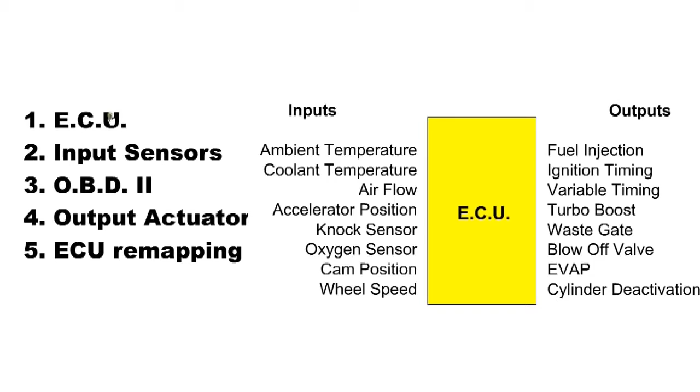This course looks at automotive control systems, the electronic control unit, input sensors, onboard diagnostics, output actuators, and ECU remapping.

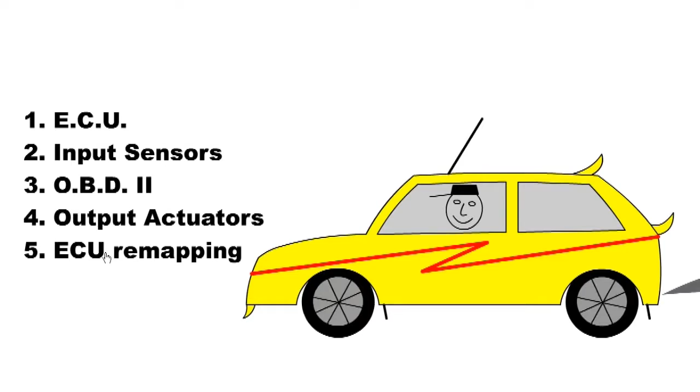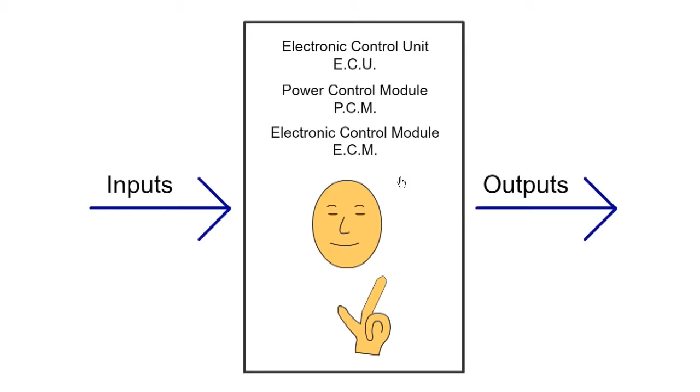The ECU is the electronic control unit, or sometimes called the PCM, power control module, or ECM, electronic control module. It's the brain and it does the thinking. It works in a harsh environment and is subjected to temperature variations, electromagnetic fields and high vibration.

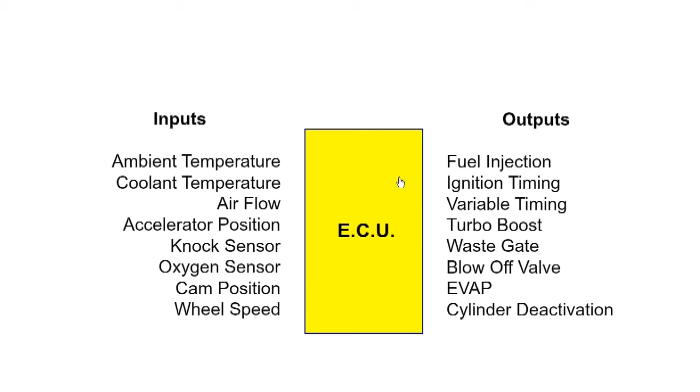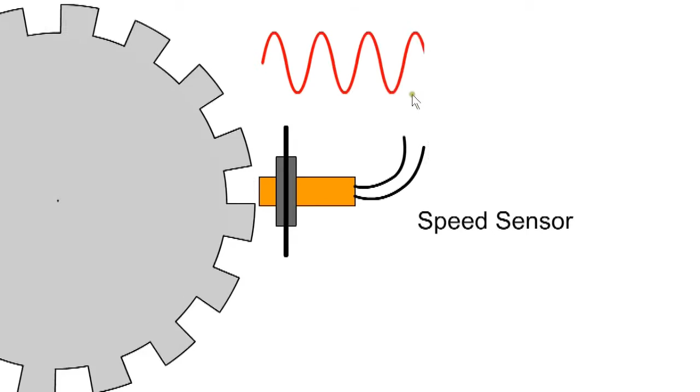First, we look at the sensors which input information to the ECU. Speed pickups are based on inductive or magnetic speed sensors. When a toothed ferrous wheel moves past the magnetic sensor, it excites a voltage in the pickup coil, producing an electrical analog waveform. The frequency of this waveform is proportional to the speed of the rotation. They are used for crankshaft, camshaft, and wheel speed sensors.

The angular position sensor uses a resistor or potentiometer to determine position. As the wiper moves, the resistance is varied and provides a signal to the ECU. They are used for accelerator position and fuel level measurement.

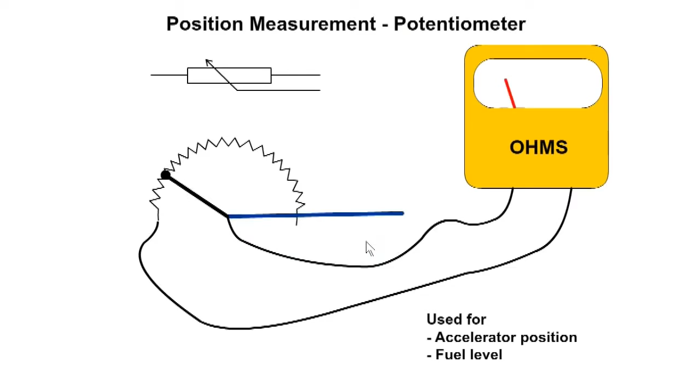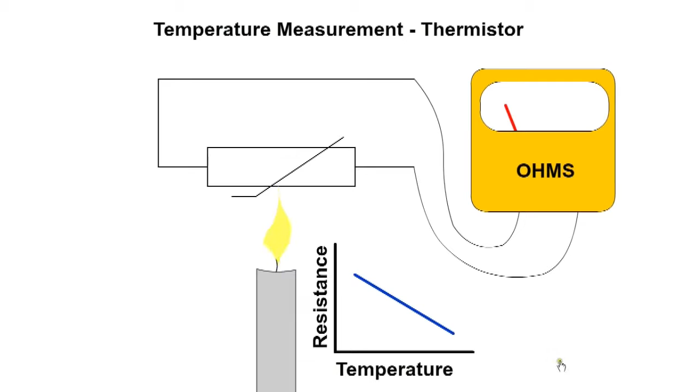Temperature sensors use a thermistor which is sensitive to a change in temperature. It has a negative temperature coefficient. The resistance of the thermistor decreases as temperature rises. They are used for intake air and coolant temperature. When resistance decreases, there is an increase in current, which is converted to a voltage signal for the ECU.

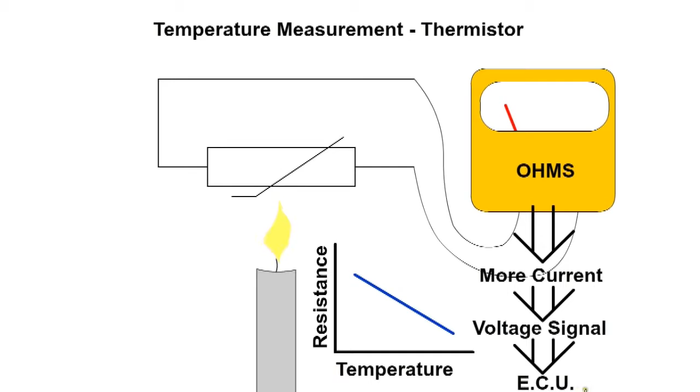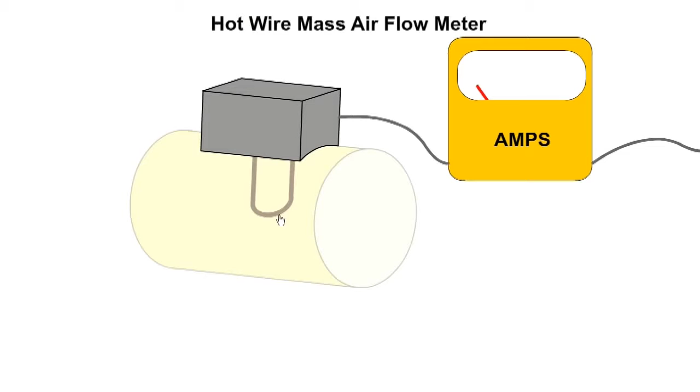The hot wire mass airflow sensor, MAF, measures the flow of air into the engine. When we look inside the housing, we see an electric wire which is heated by an electric current and is maintained at a constant temperature. When the engine is started, current passes through the wire and heats it up. As the wire heats, its resistance increases and it limits current flow.

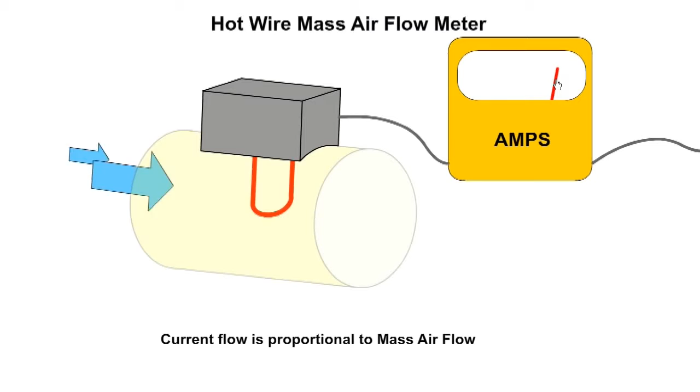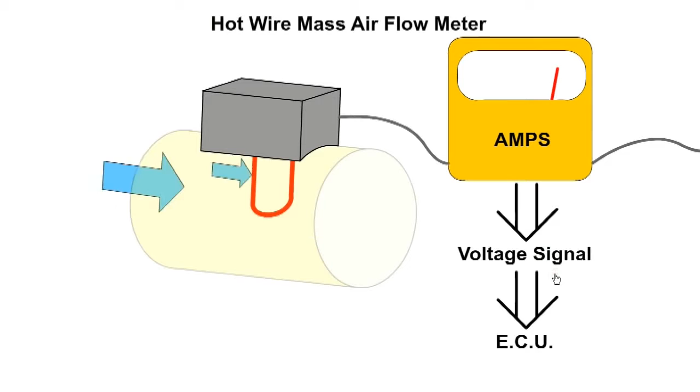An equilibrium point is reached between the heating effect of the wire and the cooling effect of the moving air. When more air flows over the wire, it is cooled. Resistance decreases, allowing additional current to flow until equilibrium is again achieved. The ECU uses the amount of electric current flowing to the heater to determine the mass of air flowing into the engine. It takes into account the temperature and density of the incoming air, and additional correction factors are not required.

The knock sensor allows the ECU to listen to the engine. It is based on a vibration sensor which consists of a piezoelectric element and is attached to the engine block. The energy from the vibrating cylinder block is converted into an electrical signal for the ECU. When the onset of the combustion knock is detected, the ECU will make appropriate alterations to the timing.

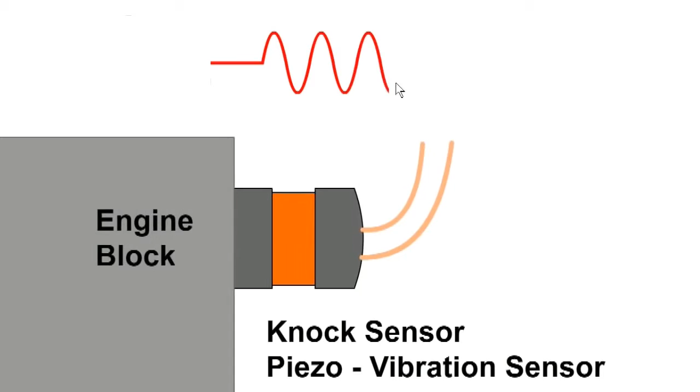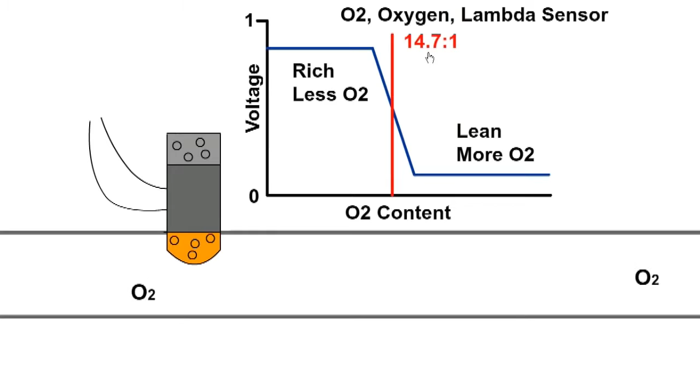The O2, oxygen or Lambda sensor, measures the amount of oxygen in the exhaust gas compared to the oxygen in the outside air. It generates a voltage from almost 1 volt in rich conditions to near 0 volts in leaner conditions, and the signal is sent to the ECU. The ideal air-fuel ratio occurs near the change from 1 volt to 0. For a petrol engine, the ideal air-fuel ratio is 14.7 to 1 by weight.

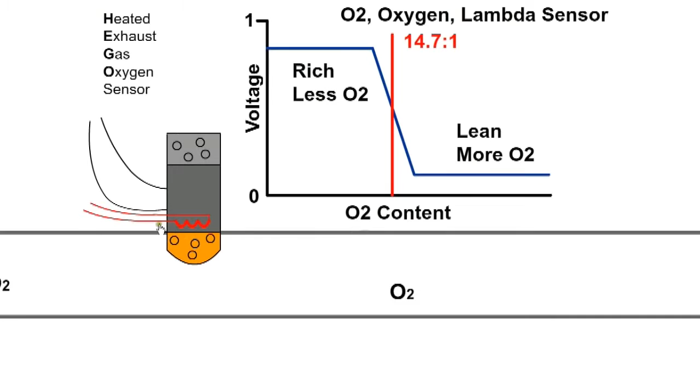Sometimes a HEGO sensor is used. This includes a heating element which gets the sensor up to working temperature faster.

We will now look at the outputs from the ECU. Ignition timing regulates the timing of the spark relative to top dead center. A signal is fed from the ECU via a relay to the relevant HV coil pack, which is located on top of the spark plug. The coil pack transforms the signal to high voltage for the spark plug.

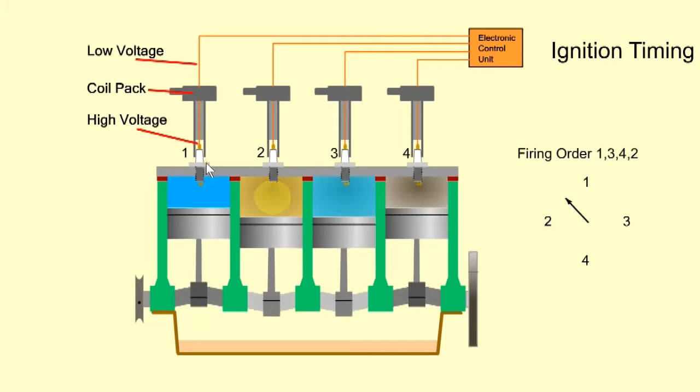Cylinder deactivation. On some cars it is possible to shut down some of the cylinders when not required, usually when cruising at light load. This is achieved by a movable cam which is splined onto the shaft. When the cylinder is not required, the cam for both inlet and exhaust valve is moved away from the cam follower, leaving the valves in a closed position.

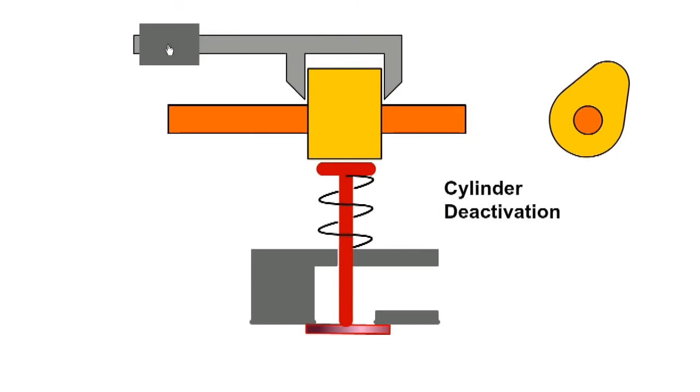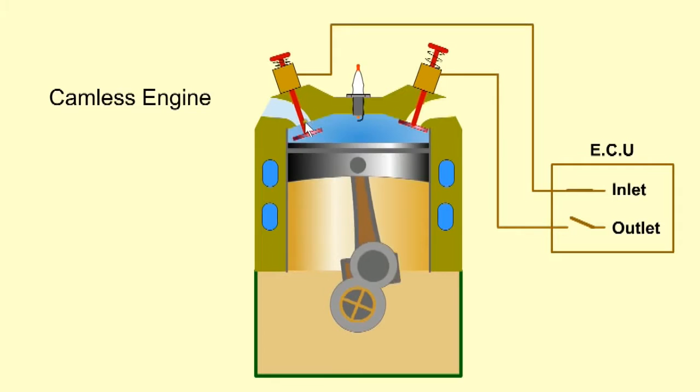A further development with the operation of valves is the camless engine. It does not have a camshaft and relies on electrical solenoids activated by the ECU to operate the valves. This allows immense flexibility with the control of timing and lift of both the inlet and exhaust valves.

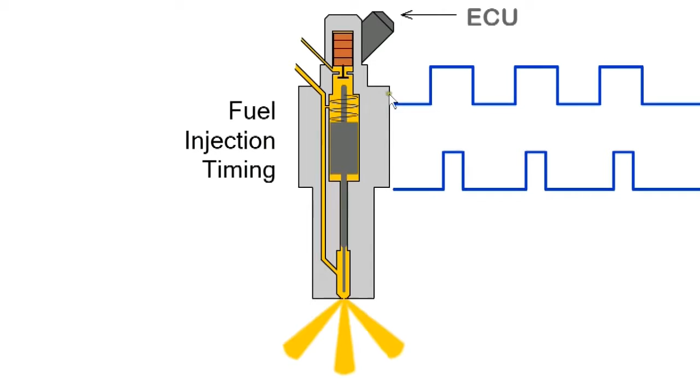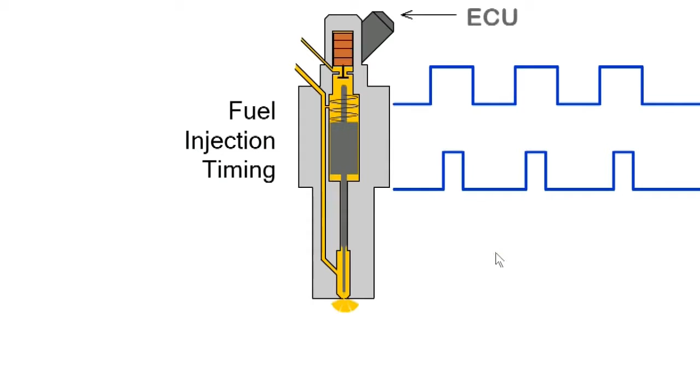Fuel injection. Injects fuel according to inputs from accelerator, airflow sensor and common rail fuel pressure sensor. Fuel quantity can be varied by altering the length and number of fuel injector pulses. When operating in closed-loop control, fuel injection is determined by the exhaust gas oxygen sensor.

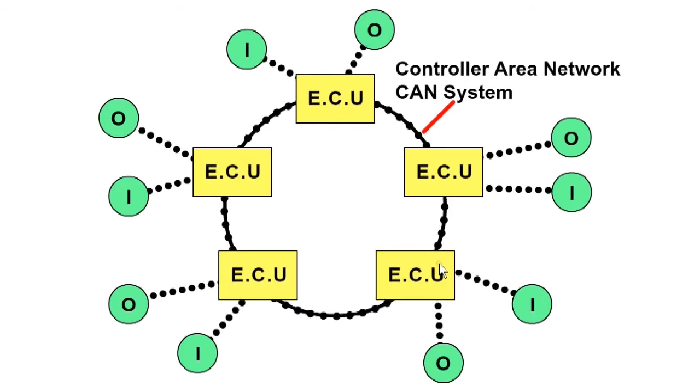Most cars have separate ECUs for different control systems, with each ECU having inputs and outputs. For example, the anti-lock braking system would have a separate ECU to the engine management ECU. All the information is transmitted between the ECUs using a bus system called a Controller Area Network, or CAN system. Each ECU is programmed to accept relevant information if required. For example, road speed might be relevant to a number of control systems.

Here we see an engine control system in operation. When the engine is started and still cold, fuel injection is determined from the amount of air flowing into the engine. The engine will have additional fuel and run rich. This is called open loop control.

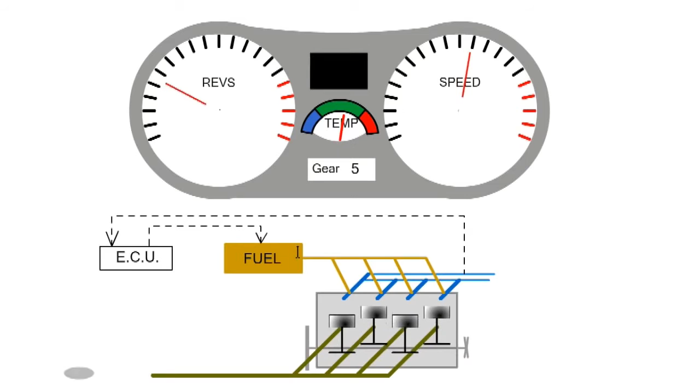When the engine is up to temperature and cruising, the ECU will use the feedback from the exhaust oxygen sensor to determine optimum fuel injection, thus reducing emissions and fuel consumption. This is called closed loop control.

If the Lambda probe should fail, the control system will revert to open loop control as there is no feedback from the oxygen sensor. It will alert the driver via the engine management light. Fuel consumption and emissions will be higher, therefore the car should be taken to a garage for repairs.

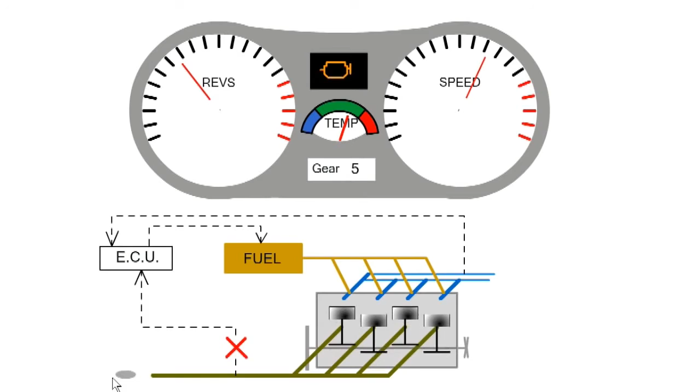The OBD2 standard, Onboard Diagnostics 2, allows code scanners or data loggers to communicate with the ECU. Fault history and fault codes can be downloaded to determine which sensors are not healthy. Caution must be exercised when using a fault scanner, as quite often when there is a faulty reading from a sensor, the source of the problem might be elsewhere in the system. Also, high resistance electrical cable connections can lead to erroneous readings, so check everything and as a last resort change the sensor.

Manufacturers program the ECU according to their requirements, and this information is a closely guarded secret. Normally engines are not operated to the limit, and the designers allow a comfort zone, allowing for extreme ambient conditions or poor quality fuel. Recently there has been an emphasis on energy efficiency and fuel economy. However, there are tuning companies which specialize in deciphering the program and modifying it, usually to produce more power from the engine. This is often referred to as a chipped ECU.

Here we look at the basic example of an ECU map, graph or lookup table. The input is the accelerator position sensor and the output is throttle position. In the past they were directly linked by the accelerator cable. Now fly-by-wire is used. For this demo both have a range of 0 to 100%. As the accelerator is pressed, we get a corresponding change in throttle position according to the graph. At 60% accelerator position, the throttle position is also 60%.